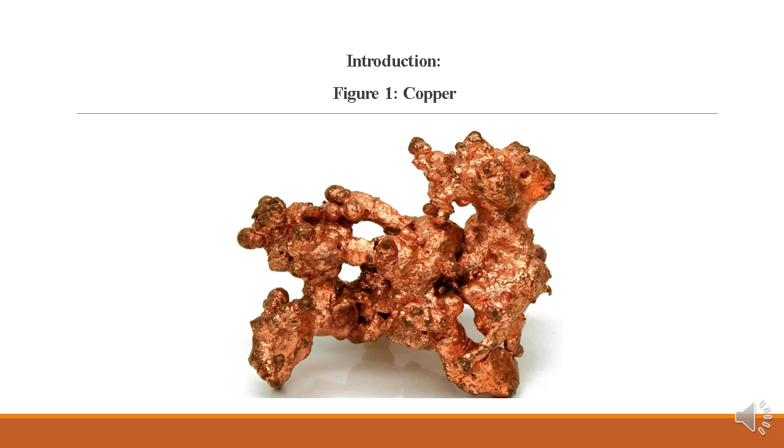Introduction about copper. Copper is a chemical element with the symbol Cu, from Latin cuprum, and atomic number 29. It is a soft, malleable, and ductile metal with very high thermal and electrical conductivity. A freshly exposed surface of pure copper has a pinkish orange color.

Copper is used as a conductor of heat and electricity, as a building material, and as a constituent of various metal alloys, such as sterling silver used in jewelry, cupronickel used to make marine hardware and coins, and constantan used in strain gauges and thermocouples for temperature measurement.

Commonly, compounds of copper are salts, which often impart blue or green color to such minerals as azurite, malachite, and turquoise, and have been used widely and historically as pigment.

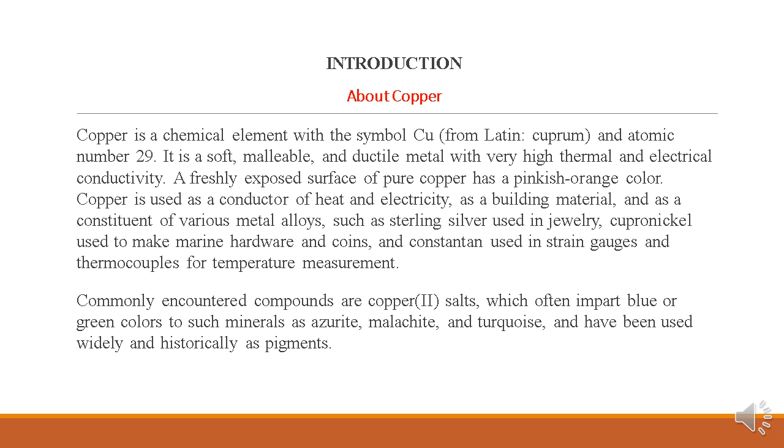Copper used in buildings, usually for roofing, oxidizes to form a green verdigris or patina. Copper is sometimes used in decorative art, both in its elemental metal form and its compound as pigments. Copper compounds are used as bacteriostatic agents, fungicides, and wood preservatives.

Copper has earned a respected place in the related fields of architecture, building construction, and interior design. From cathedrals to castles, and from homes to offices, copper is used for a variety of architectural elements, including roofs, flashing, gutters, downspouts, domes, spires, vaults, wall cladding, and building expansion joints.

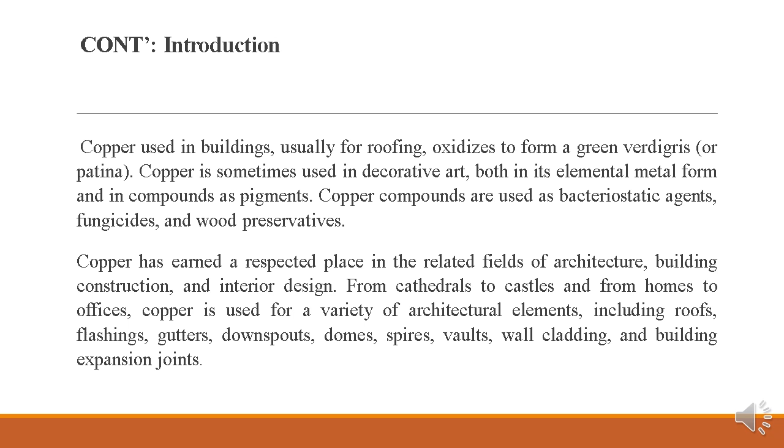The history of copper in architecture can be linked to its durability, corrosion resistance, prestigious appearance, and ability to form complex shapes. For centuries, craftsmen and designers utilized these attributes to build aesthetically pleasing and long-lasting building systems. For the past quarter century, copper has been designed into a much wider range of buildings, incorporating new styles, varieties of colors, and different shapes and textures.

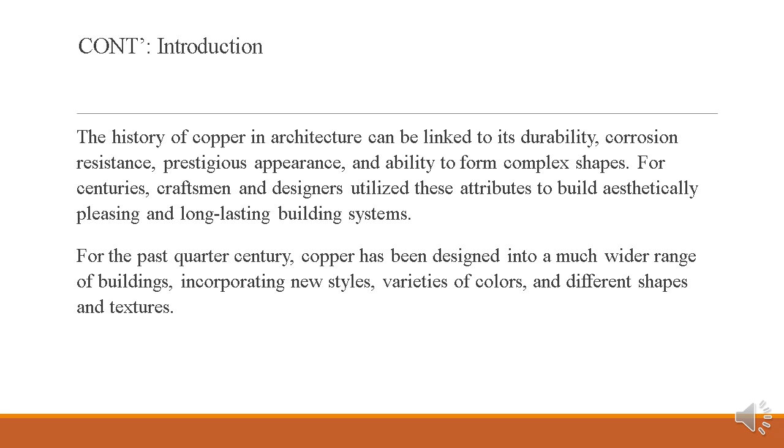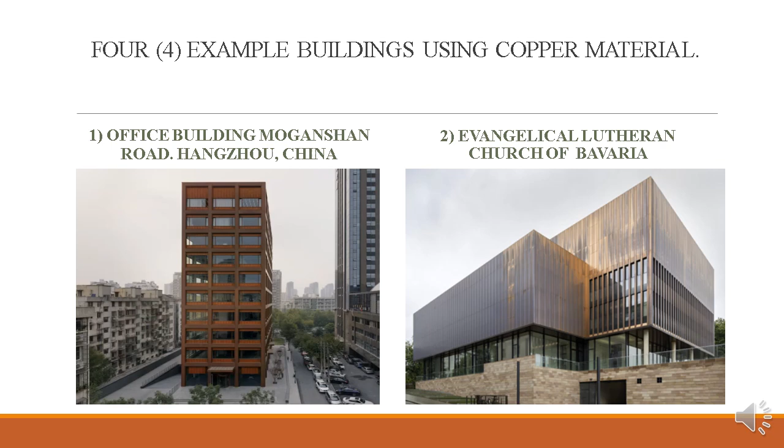This is, for example, a building using copper materials. Number 1, office building at Moganshan Road, Hangzhou, China. Number 2, Evangelical Lutheran Church of Bavaria. Number 3, Museum of Fire, Zory, Poland. Number 4, Penn State University School of Architecture and Landscape Architecture, Sala Building.

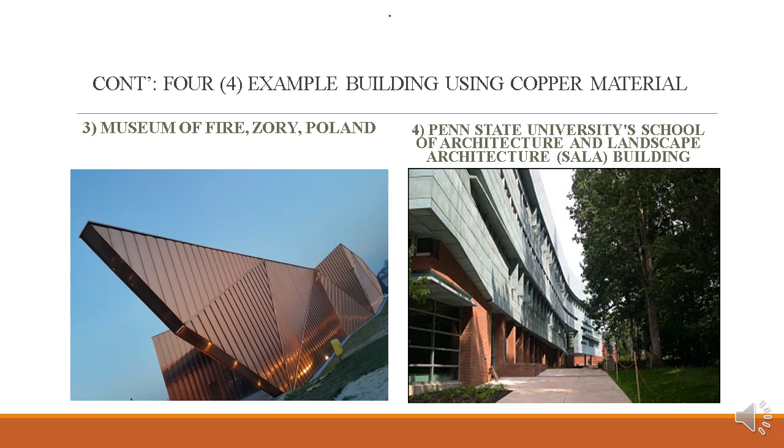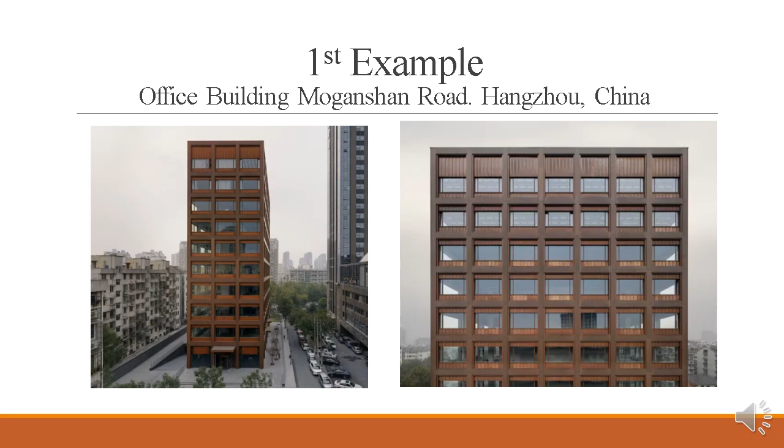First example, office building at Moganshan Road, Hangzhou, China. The 10-story office building is located in a densely built area on Moganshan Road near Hangzhou's tranquil Shuihan Park. Within this dense context, the new building asserts its object-like presence with a clear geometric form. The positioning of the slim building in the middle of the site provides spatial distance to the neighboring buildings.

Placed above street level, the volume sits as if on a stage. Together with the modulation of the surrounding exterior space, the raised level allows for a diverse transition from the city into the building. Also, all stone surfaces of the exterior topography are crafted from the same matte grey basalt. The structure of the building is based on a reinforced concrete frame.

The facade is clad with large copper cassettes reflecting the structure outwards. Smaller sheet copper elements clad the area around the windows. These smaller elements, which are manually jointed using a standing seam technique, display a degree of refinement and accentuate the surfaces within the overall structure. The rectangular columns along the narrow side of the building enhance the slender appearance, and the lustrous surface of the bronze cladding gives the facade an elegant, vibrant look.

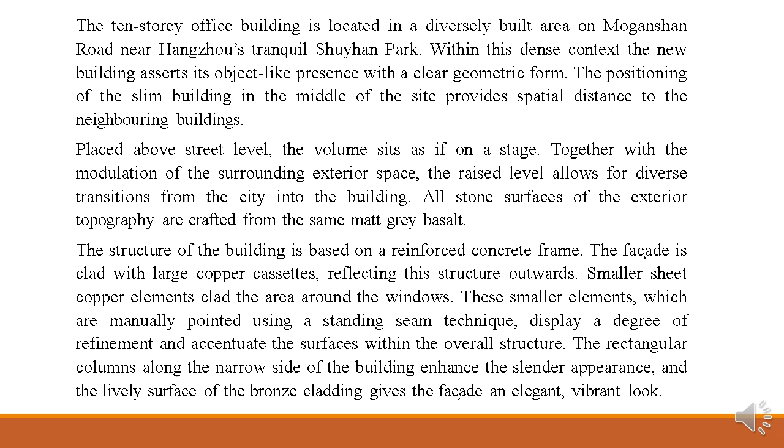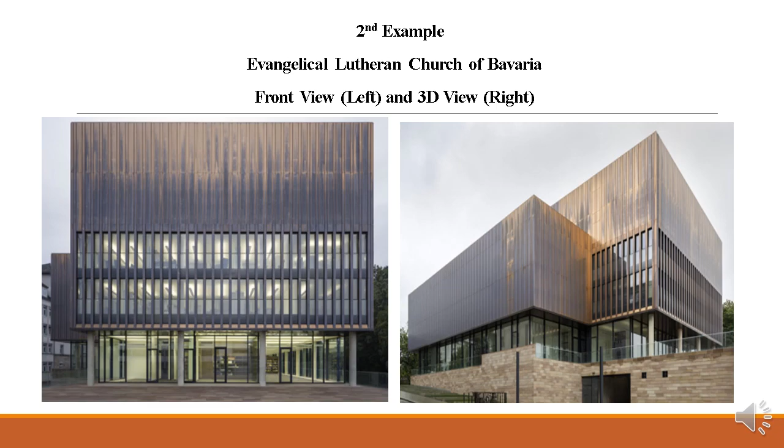Second example, Evangelical Lutheran Church of Bavaria. On the left, front view, and on the right, a 3D view. The copper wall will gradually change color from dark gray to rich brown on the exterior of this church archive in Nuremberg, Germany. The seven-story structure houses the archive of the Evangelical Lutheran Church of Bavaria and is located close to the main church building on the site of a former factory.

The design features a pinkish sandstone plinth for the base of the building. This allows it to nestle against the side of a hill as well as to fit in with its neighbor. A glazed ground floor is sandwiched between this plinth and the copper-clad upper floor, which comprises two overlapping box-like volumes. The plinth of the reinforced structure is clad with reddish sandstone, which forms a continuation of the existing sandstone wall and anchors the building in the landscape context.

The external walls of the archive are finished in a shiny copper facade with a subtle vertical structure. The oxidizing copper panels are arranged vertically and interspersed between narrow metal strips. Alternate panels extend down over windows, creating the appearance of columns. The natural metal surface will undergo various oxidation stages and color changes until it finally develops a velvety brownish appearance.

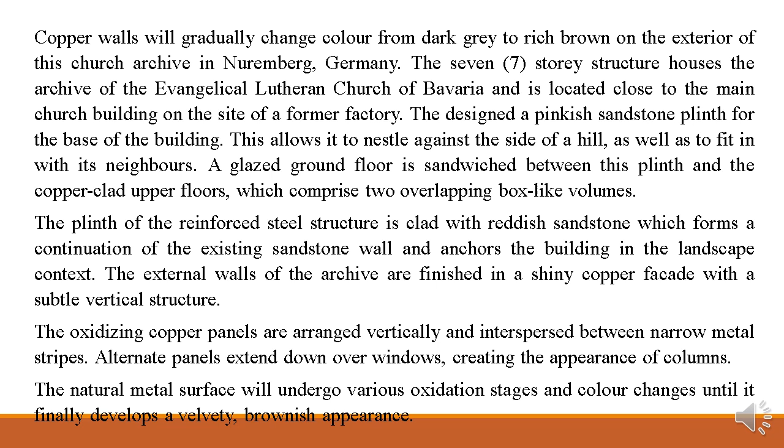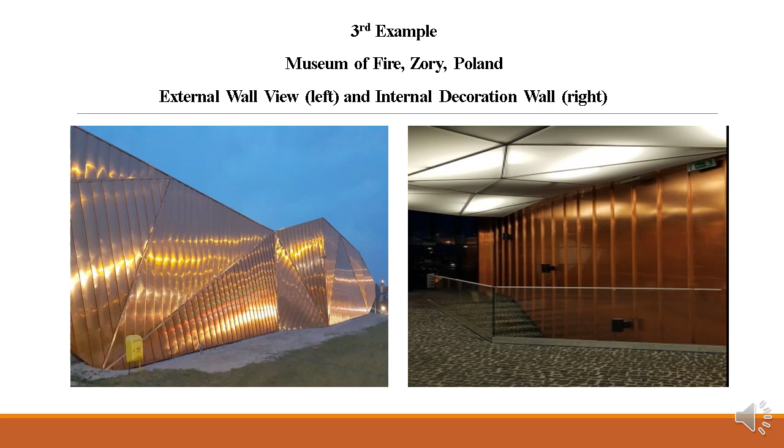Third example, Museum of Fire, Zory, Poland. On the left, external wall view, and on the right, internal decoration walls. The Museum of Fire has been created where its primary function is to promote the municipality. The small structure has arisen at the edge of town and acts as a landmark, indicating to people that they have just entered Zory.

This unusual building, the Museum of Fire, resembles a flame creeping along the ground. The pavilion comprises three wavy walls joined with glazed sections, forming a sculpture-like composition. It has been developed on an embankment, making it highly visible from all directions. Architects Barbara and Oskar Grabczewski have broken, folded, bent, and cut its body in such a manner that it represents the natural behavior of fire.

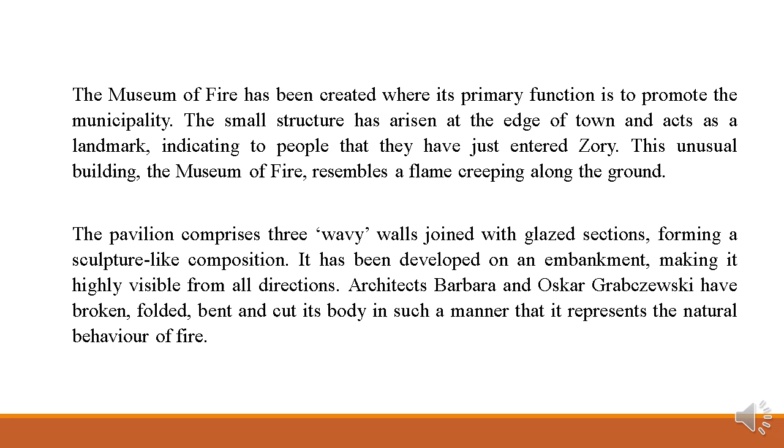The association with fire is enhanced by the copper facade, which triggers an impression of burning fire when shimmering in the sunlight. Not only does the copper lend a fiery color, but having been polished, it shines brightly and reflects the surroundings. If the copper were left exposed to the elements, it would oxidize and patinate, eliminating the fire effect of the copper.

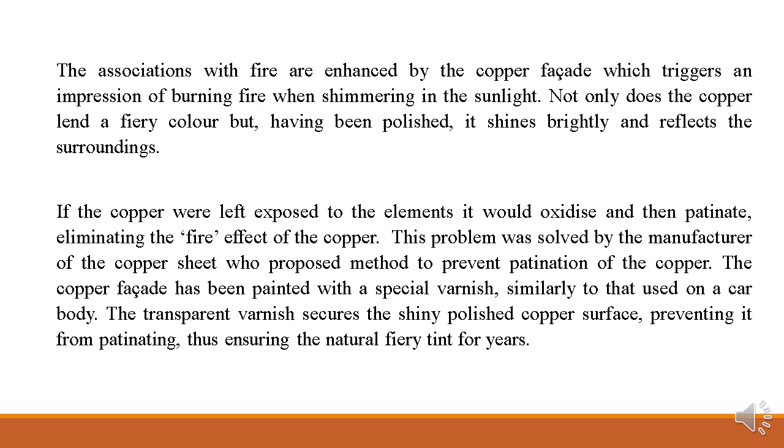This problem was solved by the manufacturer of the copper sheet, who proposed a method to prevent patination of the copper. The copper facade has been painted with a special varnish, similarly to that used on a car body. The transparent varnish secures the shiny polished copper surface, preventing it from patinating.

Natural concrete walls are used inside the building, where one will find a number of exhibition rooms that have unusual forms. The building holds multimedia exhibitions demonstrating scientific aspects of the natural phenomena which surround us. It is modern in form and architecturally uncompromising in design, for people curious about the world - the younger ones predominantly, but it still escapes artificial divisions.

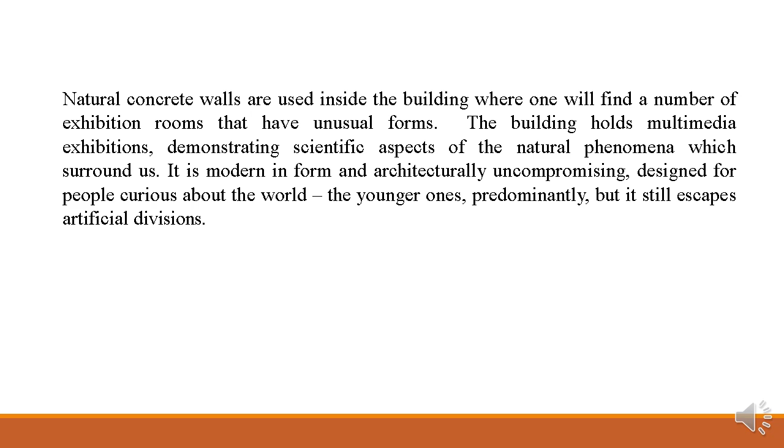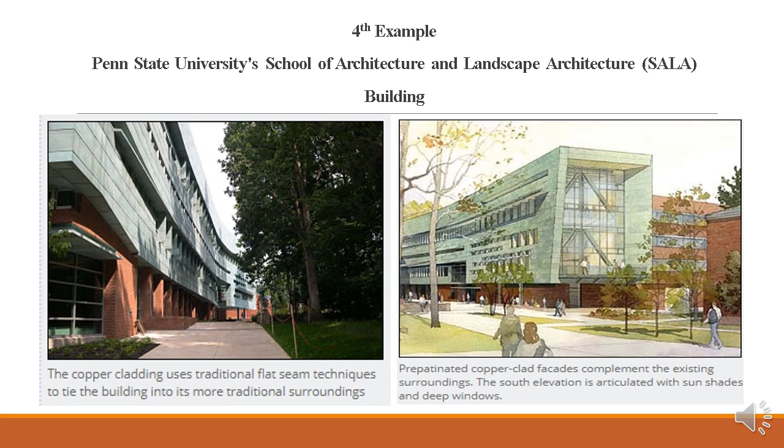From the beginning of the project, there was a clear commitment by all involved to practice what they teach, and to achieve a LEED silver rating at a minimum. With this goal in mind, the designers used aspects of sustainability to consider all of the issues around the building, including its siting, envelope, systems, and materials. They made extensive use of computer modeling in the design phase to consider the impact of different design and material choices on the performance of the building.

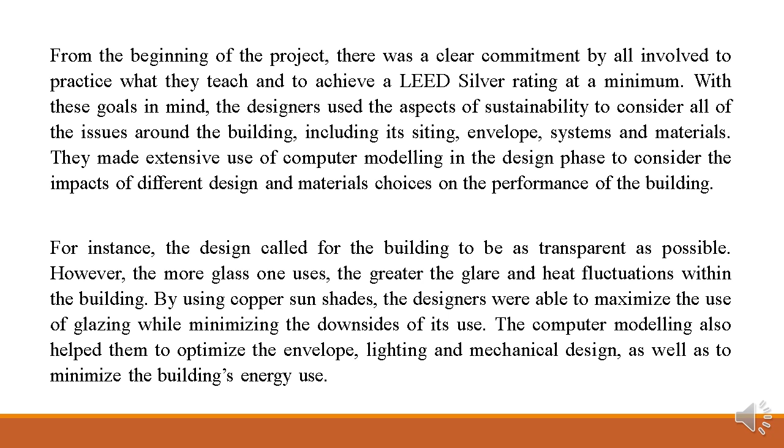For instance, the design called for the building to be as transparent as possible. However, the more glass one uses, the greater the glare and heat fluctuation within the building. By using copper sunshades, the designers were able to maximize the use of glazing while minimizing the downside of its use. The computer modeling also helped them optimize the envelope, lighting, and mechanical design, as well as minimize the building's energy use.

More than 30 tons of copper is used throughout this project. Most noticeably, 95% recycled copper is used in the 49,000 square feet of pre-patinated cladding.

From the exterior surface to the plumbing under the floor, copper contributes to the building's financial and environmental performance. Throughout the project, copper was considered a good material choice due to its recycled content, the high rate of recyclability at the end of its use in the building, its local availability, low or non-existent maintenance costs, and its durability. Further, the project called for a sculpted exterior to fit with its traditional surroundings, and copper proved to be the ideal material to work with.

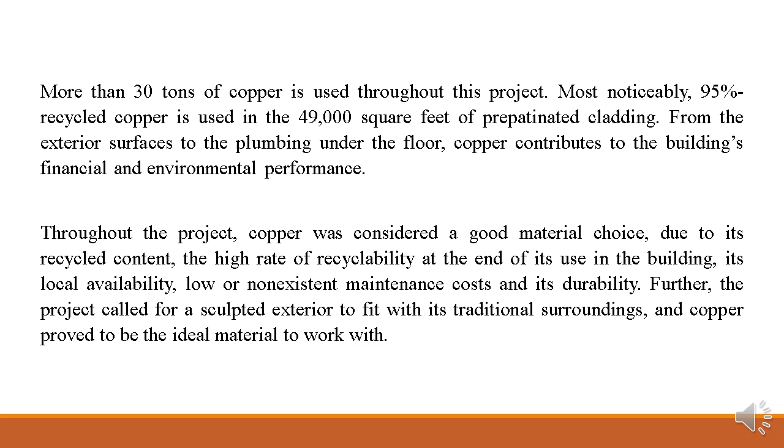The copper cladding demonstrates attainment of both material performance and aesthetic objectives. The cladding used the traditional flat seam technique to tie the building into its more traditional surroundings and the older campus buildings close by. Copper's flexibility allowed the designers to use the amount of glazing desired while minimizing the glare that can often accompany it, by manipulating the copper to create vertical and horizontal sun shading. The shading minimizes glare and also reduces temperature variation within the building.

To maximize the low maintenance benefit of the cladding, copper was used for all of the soffits and sun shades. Over the building's life, copper's limited maintenance requirements and exceptional durability will translate into substantial cost savings and will avoid environmental impact from cleaning and replacement. Another unique use of copper is on the ceiling of some of the large atriums, providing an attractive accent to the rest of the gypsum ceilings.

While there was some concern about the higher upfront cost of copper, the university and designers looked hard at the long-term cost implications of their material choice. The positive result ensured copper's prominent role.

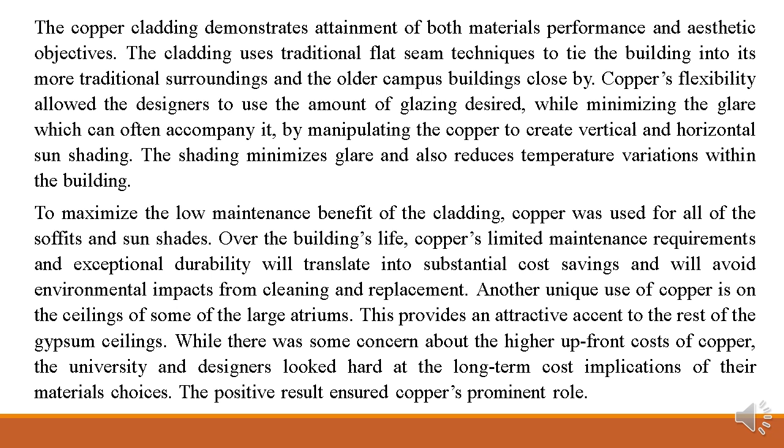The building also earned a credit for use of local and regional materials because 87% of its materials were harvested within 500 miles of the campus, including the copper. Further, by allowing the designers to achieve their goal of maximum visual transparency without glare and temperature drawbacks, copper contributed to the achievement of a LEED credit for daylight and views.